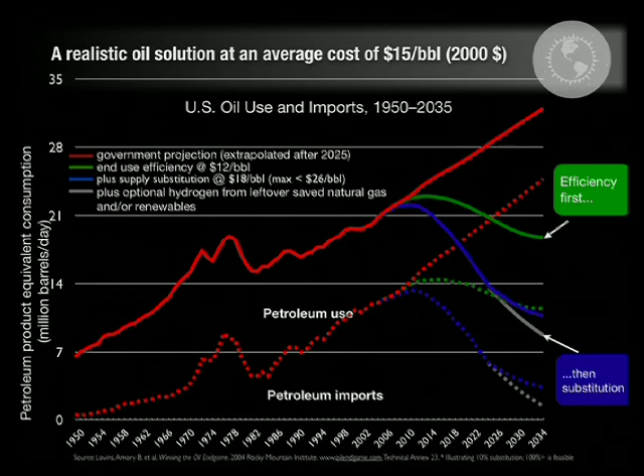And then we would substitute saved natural gas and advanced biofuels for the other half at an average cost of $18 a barrel. The average cost was thus only $15 a barrel, five-fold cheaper than buying oil today, assuming that all of the hidden or external costs of buying and burning the oil are worth zero, a conservatively low estimate.

Our costliest barrel of savings or substitutions would be $26 oil, and the business case is so compelling, therefore, that implementation would need no new federal taxes, subsidies, mandates, or laws.

Now, 70% of U.S. oil is used in vehicles, but their efficiency can triple without compromise, but with better safety, by making them very lightweight, more slippery in moving through the air and along the road, and giving them advanced propulsion. This often improves their performance too, for example, with this Opel diesel hybrid concept car, which does 150 miles an hour and 94 miles a gallon, although not at the same instant.

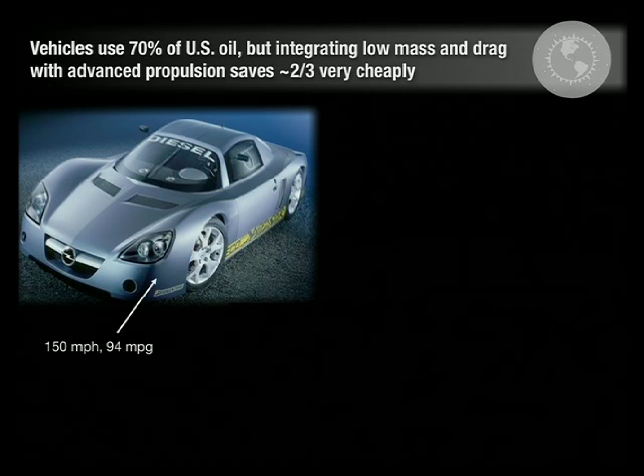Triple efficiency cars can repay any extra cost in about a year, triple efficiency trucks even faster, triple efficiency planes in a few years.

Now, such breakthrough vehicles can serve all purposes and tastes. For example, 10 years ago, my team and 2 European industry partners designed this uncompromised, safe, high-performance, mid-sized suburban assault vehicle. It uses 72% less fuel than its steel equivalent and would sell for $2,500 higher sticker price, a 1-year payback, because it's a hybrid electric, but its 53% lighter weight is free, as I'll explain in a moment.

3 years ago, Toyota showed a carbon fiber concept car with the same interior size as a Prius, but half its fuel use and a third its weight. Its tiny battery bank is recharged by a half-liter engine tucked under the rear seat.

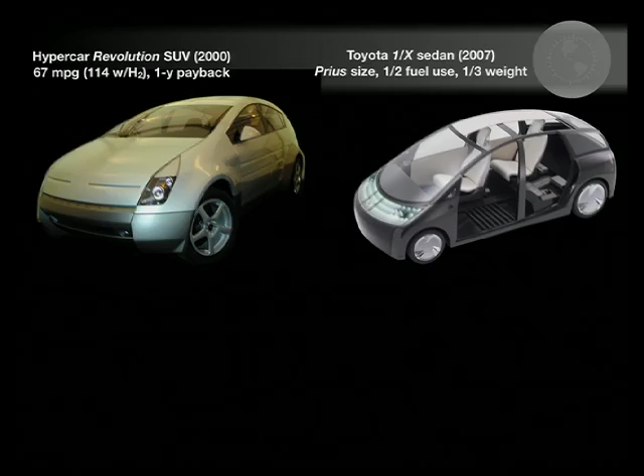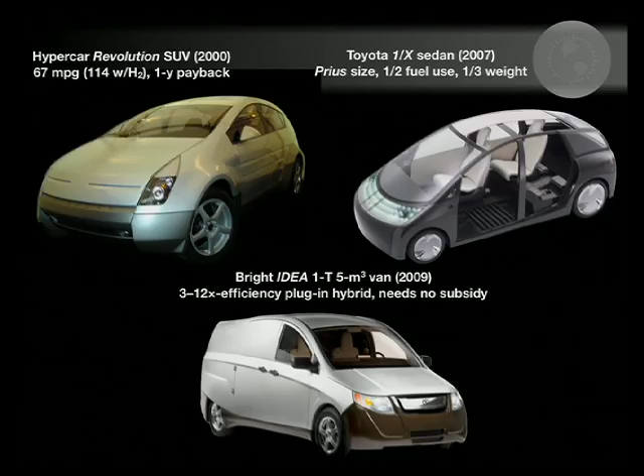And in April '09, RMI's fifth spinoff, which 2 days ago announced a strategic partnership with General Motors, showed this 3 to 12 times more fuel-efficient aluminum van. But unlike other plug-in hybrids, this one needs no subsidy to attract fleet buyers because its lightweight and low drag eliminate most of its costly batteries.

Such platform fitness, taking the obesity out of the car, a ton of it in this case, is the key to electrification, which also creates huge opportunities in the electric sector.

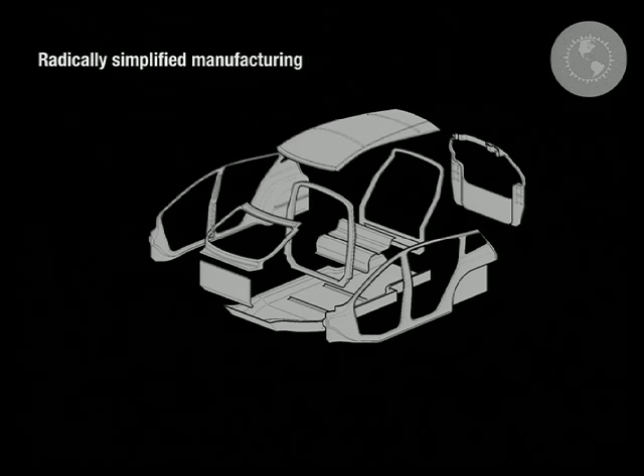Now, ultralighting is the most important automotive game changer for 3 reasons. Only 0.3% of a typical car's fuel energy actually moves the driver. Over two-thirds of the energy needed to move the car is caused by its weight, and every unit of energy you save at the wheels saves 8 units of fuel at the tank.

Huge leverage. But ultralight, ultra-safe cars needn't cost more to build. Here's why. That SUV you saw a minute ago has only 14 parts, each made with one low-pressure die set, saving about 99% of, say, a $500 million tooling cost.

Each part can be lifted with one hand and no hoist. The parts then snap precisely together for bonding without needing the robotic body shop. Laying color in the mold can also eliminate the paint shop. There go the 2 hardest and costliest parts of automaking.

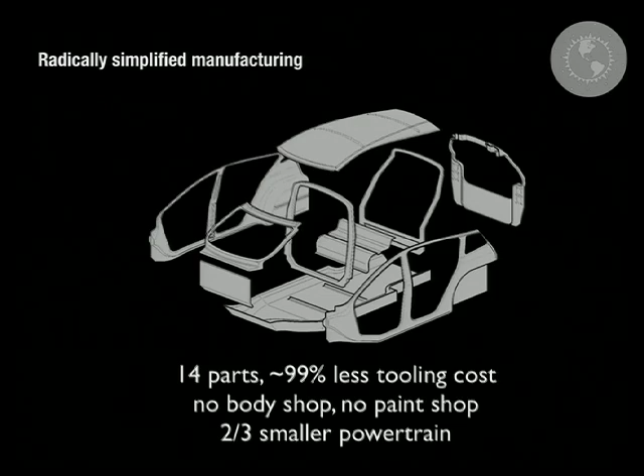And then the propulsion system is also 2/3 smaller, hence lighter and cheaper. All these savings pay for the carbon fiber, making the ultralighting free. New manufacturing from RMI's third spinoff, or its Japanese competitors, can make carbon fiber parts like this test piece.

Tougher than titanium, in just 1 minute, scaling to automotive cost and speed with aerospace performance. Also makes a good carbon cap.

I'll pass this around, don't worry about dropping it. It's been whacked with a sledgehammer without even marking it.

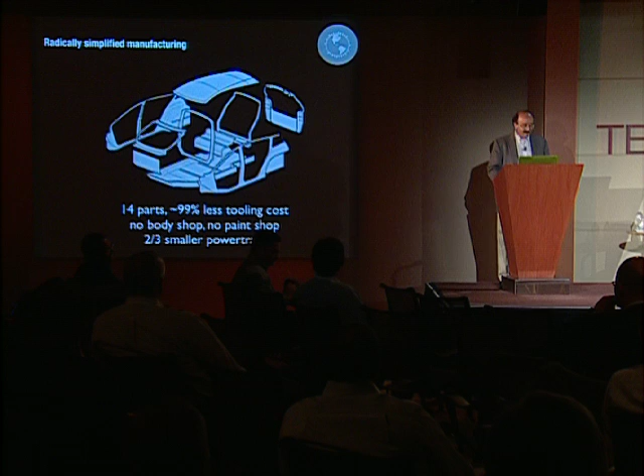Now, if you make all U.S. light vehicles this way, that saves oil equivalent to finding a Saudi Arabia under Detroit, because ultralighting saves half the weight and half the fuel.

The car gets safer because this stuff absorbs 12 times as much crash energy per pound as steel, and the car costs the same to make.

My team accelerates such breakthrough oil savings by institutional acupuncture. That is, we figure out where the business logic is congested, not flowing properly, and stick little needles in it to get it flowing. Our partners range from Ford to Walmart, Boeing to the Pentagon, a bunch more.

Of course, taking the world beyond oil requires 6 sectors to be transformed: cars, trucks, planes, fuels, military, and finance. And I think 3 or 4 of those at least are already around or past the tipping point where it starts getting easier, even though there's still a lot of hard work to do.

For example, Boeing converted its 787 Dreamliner leapfrog efficiency into a breakthrough competitive strategy by rolling out those innovations to every airplane it makes before Airbus could steer itself out of the ditch.

And 6 years ago, we suggested Detroit follow suit. 2 years later, Ford hired the head of Boeing Commercial Airplanes as its own CEO, and now Ford is a sales and innovation winner. Last year, mainstream analysts even began to see peak oil not in supply, but in demand.

April '09, ExxonMobil agreed with many forecasters that U.S. gasoline use had peaked in '07 and will only go down.

Intensifying this shift away from oil is a parallel revolution in how road vehicles are used. If this daily traffic congestion graph were an electricity load shape, we'd apply many new IT-enabled demand response and smart grid techniques to flatten it out.

And not yet doing this for road traffic is wasting trillions of dollars net present value through idle people, idle vehicles, and idle roads.

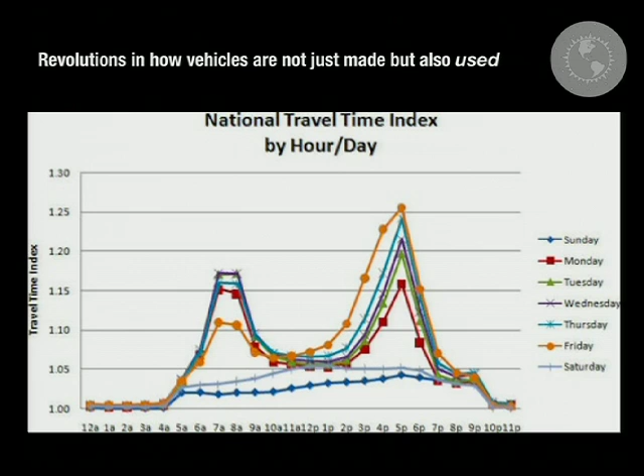But now we can charge variabilized real-time driving costs per mile, not per gallon, make traffic free flowing, use smart IT to enhance transit and empower car and ride sharing, and compete physical mobility against virtual mobility and negatrips created

by smarter land use and real estate models like new urbanist design, so people are already where they want to be and needn't go somewhere else. Those business opportunities are immense.

Even more disruptive will be solutions economy business models like Zipcar that lease a mobility or access service rather than selling cars and gallons. This IT-rich transformation can boost cars' 4% asset utilization by perhaps an order of magnitude.

My second big story is about saving electricity and then making it differently. These twin revolutions promise more numerous, diverse, and profound disruptions in electricity than in any other sector, a future most utilities are ill-equipped to foresee and forestall.

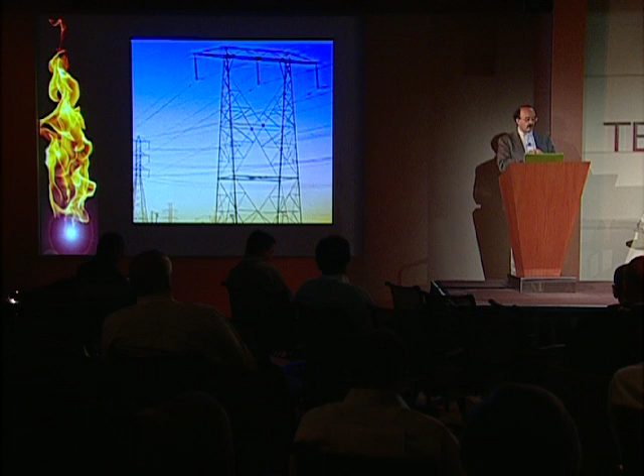21st century technology and speed are colliding with 20th and 19th century institutions and culture to create an inflection point where huge sums will be made or lost.

About 70% of U.S. electricity is used by buildings, 30% by industry. Roughly 3/4 of our electricity is wasted, according to my team's 1,000 technology efficiency assessment 2 decades ago, and since then, efficiency technologies have improved faster than they've been applied, so the potential savings are now even bigger and cheaper.

But an even more disruptive innovation we've been hatching is integrative design, which turns diminishing returns into expanding returns to investments in energy efficiency. That is, integrative design can make very large energy savings cost less than small or no savings. For example, here's our house in Old Snowmass near Aspen, Colorado.

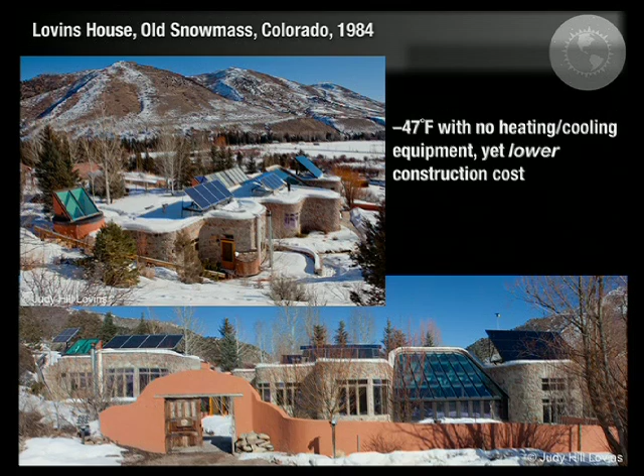Judy and I live there at 7,100 feet elevation, where temperatures have dropped as low as minus 47 F. Continuous midwinter cloud can last 39 days, and frost can occur any day of the year. But this house is fossil fuel free, a net energy exporter, and 99% passive solar heated with no conventional heating or cooling equipment, making it $1,100 cheaper to build.

Inside is this emerging tropical jungle, now ripening our 35th banana crop. In 1984, this house was saving about 99% of its space and water heating energy and 90% of its electricity with a 10-month payback. Today's technologies, which we've just retrofitted, are even better.

And the key is integrative design that gives multiple benefits from single expenditures. For example, the white arch you can see in the upper left has 12 functions, but only one cost. Hardly any component has fewer than 3 functions.

Yet the house needn't look like this to work like this, and its design approach works in any climate, including eliminating air conditioning up to at least 115 Fahrenheit with lower construction costs and better comfort. The same approach works for big buildings, old and new.

A retrofit now underway is expected to save 38% of the Empire State Building's energy. Remanufacturing its 6,500 windows on site into super windows that are almost perfect in letting in light without heat, plus better lights and office equipment, cuts the peak cooling load by 1/3.

And then instead of replacing and expanding the old chillers, we can renovate and reduce them, saving $17-odd million at capital cost that helps pay for the other improvements and cuts the payback to 3 years.

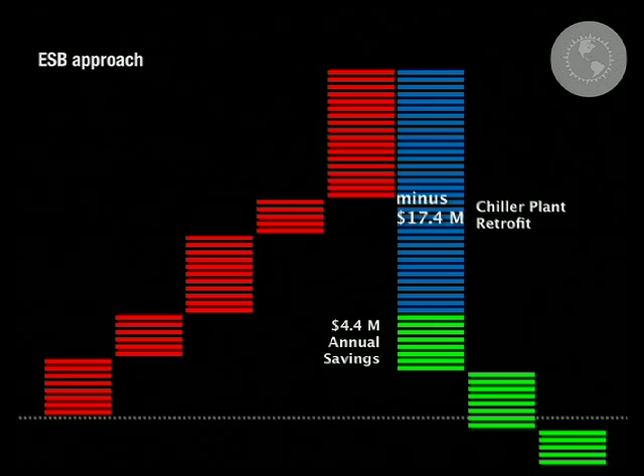Similarly, retrofitting a 20-year-old curtain wall office tower near, say, Chicago could save 3/4 of its energy with a minus 5-month payback that is slightly cheaper than the routine 20-year renovation you have to do anyway that saves nothing. The same approach works great in industry too.

For example, 3/5 of the world's electricity runs motors, half of that runs pumps and fans, and we can save about half of all the motor energy with a 1-year payback by retrofitting 35 integrated improvements. But first, we ought to stop wasting most of the energy used by the pumps, fans, and other motor-driven devices.

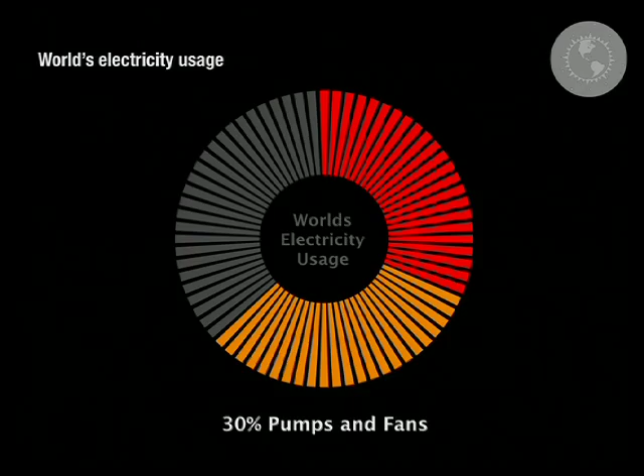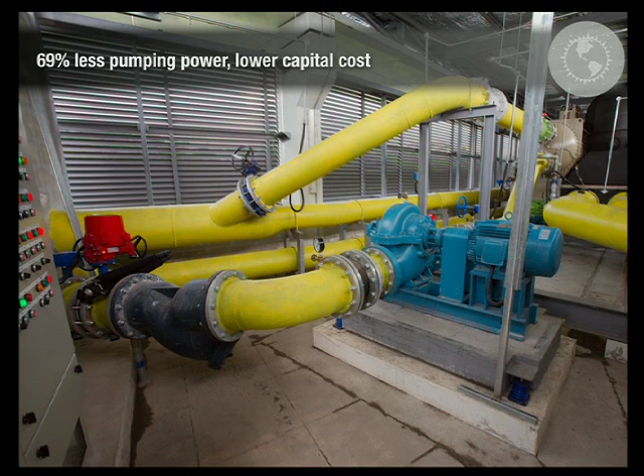For example, pumps, the biggest use of motors, move liquid through pipes. A Dutch colleague redesigned a typical industrial pumping loop to use at least 86% less pumping energy and cost less to build just by using fat, short, straight pipes instead of skinny, long, crooked pipes. This recent design on those lines in Singapore saved 69% of normal pumping energy at lower construction cost.

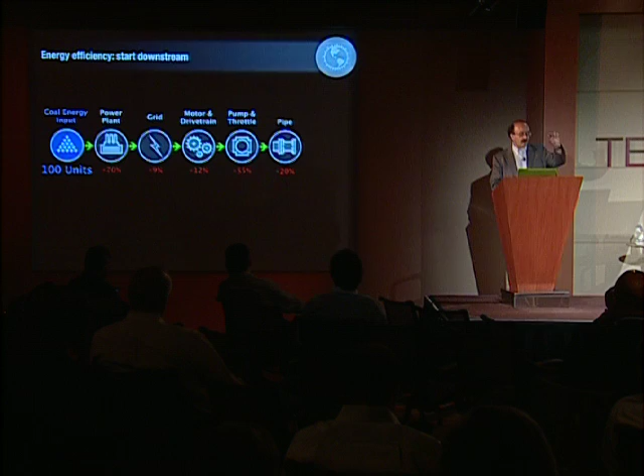So what does this mean for the electricity that's 60% used in motors? Well, from the coal burned at the power plant to the end use, many successive losses compound, so only 1/10 of the energy in the coal comes out the pipe as flow.

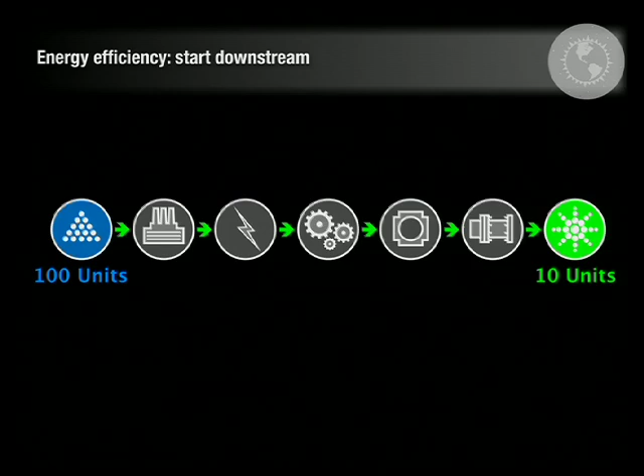But now turn that around backwards, so those compounding losses turn into compounding savings, and every unit of flow or friction you save in the pipes saves 10 units of coal cost pollution and global weirding back at the power plant. Also, as you go back upstream, each component gets progressively smaller and cheaper, so you save the most capital cost too. My team has lately found such snowballing energy and capital savings in more than $30 billion worth of

industrial redesigns in 29 diverse sectors, from data centers and chip fabs to mines and refineries. Typically, our retrofit designs save about 30 to 60% of the energy with 2 or 3 year paybacks, while our new facility designs save 40 to 90% with lower capex.

Meanwhile, that's all on the demand side. How the world produces electricity is shifting faster than most experts realize. Wind and solar power are growing explosively, while central station orders wither because they cost too much and they have too much financial risk to attract investors.

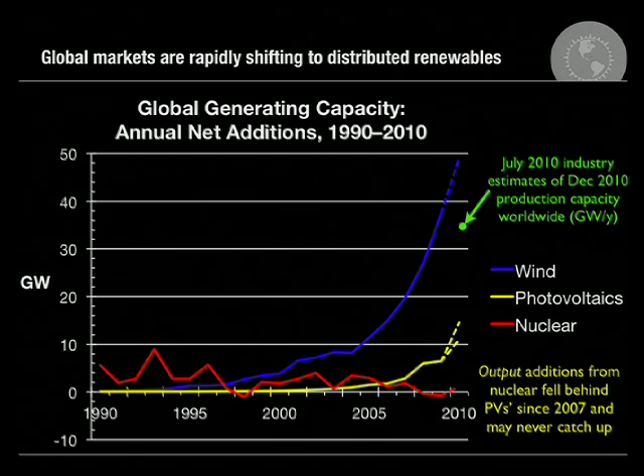By the end of this year, the industry is betting that the world will probably be able to produce 35 billion watts of photovoltaics every year. Grid-connected solar power has sustained 60% average annual growth for a decade and is entering takeoff now into low price and high volume. This renewable power revolution, the biggest infrastructure shift in history, is increasingly led by China, which is now #1 in 5 renewable technologies and just blew past its 2020 wind target.

Power sources that get their economies from mass production, not from giant units, have swapped their share of global electricity production with nuclear power's share. What The Economist magazine calls micropower, that is cogeneration plus renewables minus big hydro dams, made 91% of the world's new electricity year before last.

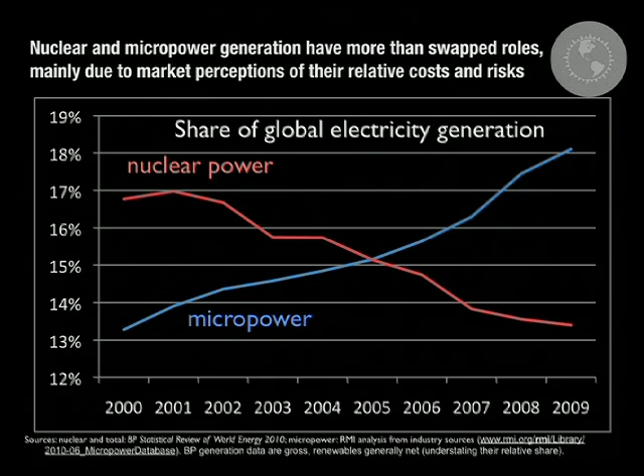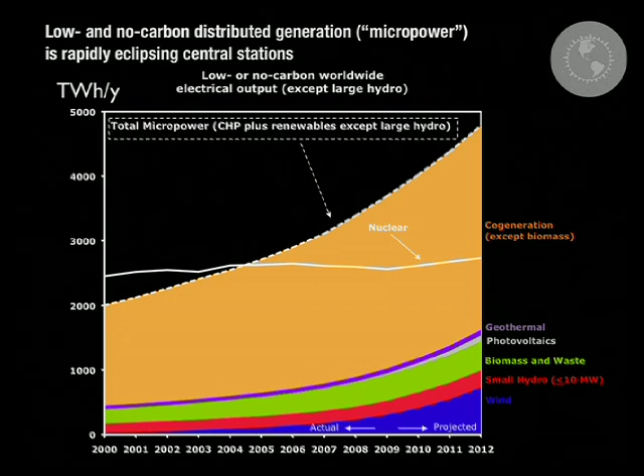Micropower and efficiency are walloping all the central power plants in the world market, mainly due to their lower cost and lower financial risk. So micropower's output, as summarized here, is booming, while nuclear output just fell for the 3rd year. Micropower will surpass nuclear power in global capacity this year and in output in about 4 more years.

Last year, all renewables made up 1/4 of global power capacity, half of the new capacity, over half of the power plant investment, and they generated 18% of global electricity. Renewables, except big hydro last year, got $131 billion of private capital and added 52 billion watts, while new nuclear plants got no private capital and lost capacity.

In the US, they're over 100% subsidized, but they still can't raise any private capital because they have no business case. So here's the number of reactors in blue and their capacity in red that the International Atomic Energy Agency lists as under construction in each year since 1950. The nuclear renaissance is this little uptick recently to 24% of the 1979 construction peak.

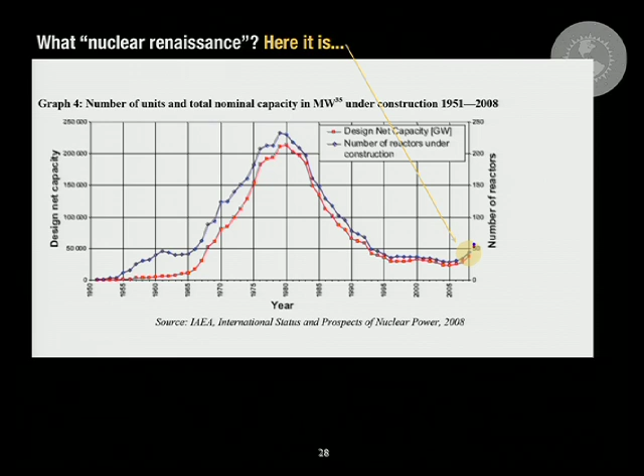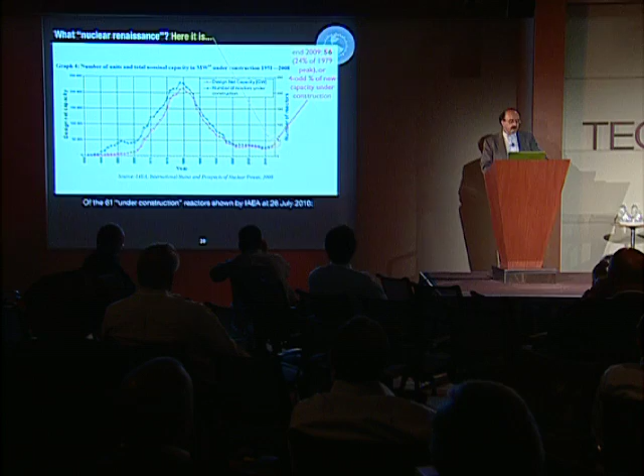There are now 61 nuclear plants officially under construction. However, of those 61 units, 12 have been listed under construction for over 20 years. 39 have no official startup date, half are late, 72% are in 4 untransparent power systems. All 61 were bought by central planners, and none were free market transactions.

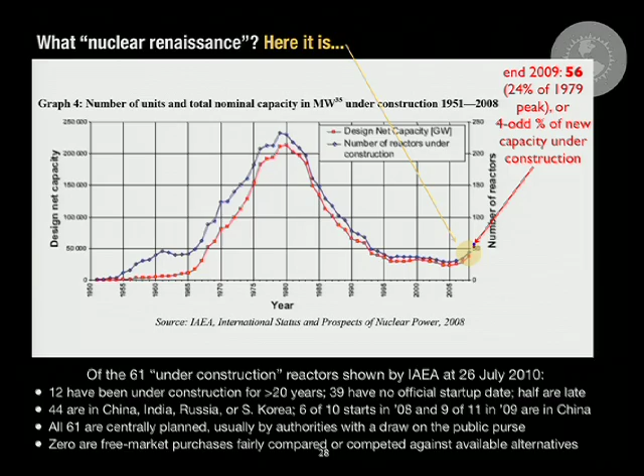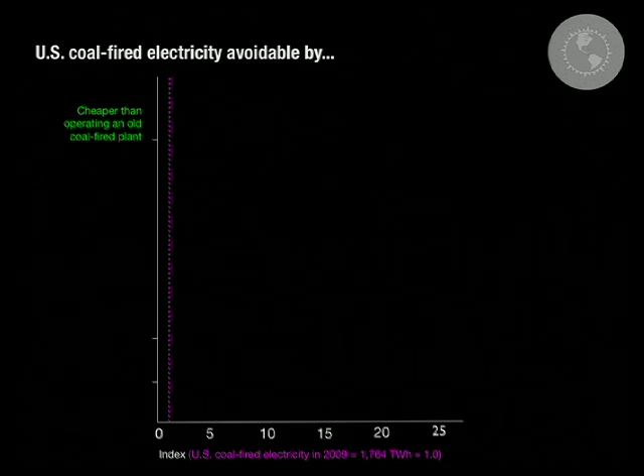So, with nuclear power so uncompetitive in any market system, how else can we displace the coal-fired half of our electricity, which I'll show as a magenta line? Well, first come options that are cheaper than running an old coal plant. Using electricity nationwide as productively as the top 10 states actually did on average use it 5 years ago, correcting for each state's economic mix and climate, would save about 65% of our coal-fired electricity.

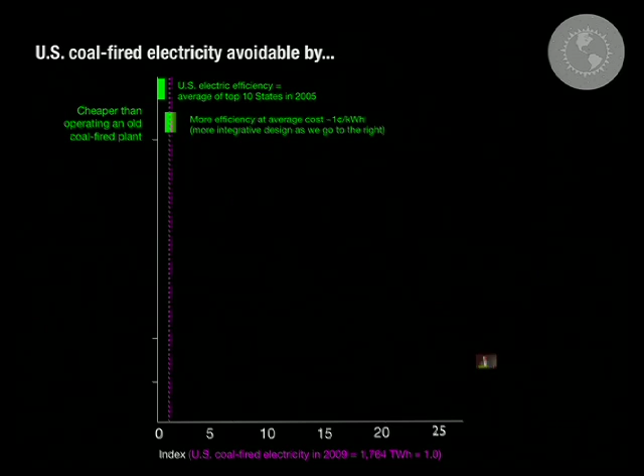Of course, even more could be profitably saved. Last year, shifting fuel prices made it cheaper to run coal plants less and existing very efficient gas plants more, and that cost gap will widen. This will save 35% of coal-fired electricity at a profit, and 35 plus 65 is 100, so we already have the options needed to eliminate those coal-fired power plants cheaper than just running them.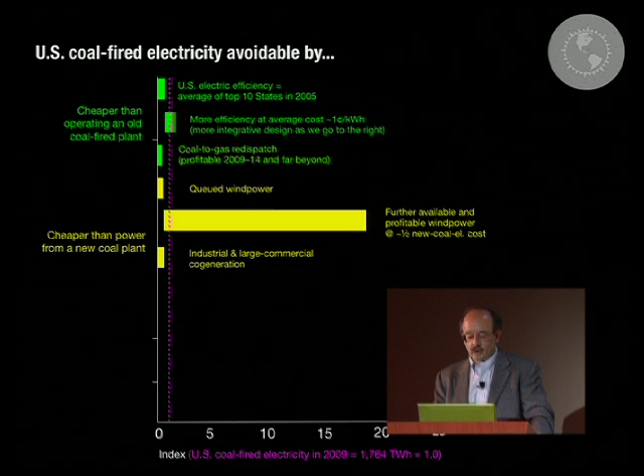Next would come options cheaper than new coal power. Wind power, now awaiting interconnection, could replace about 2/5 of coal power. All the profitable wind power on available land could displace the coal power 19 times over. Cogeneration in industry and big buildings could displace about 65% of the coal power, plus more in small commercial buildings and houses, plus other renewables not yet counted.

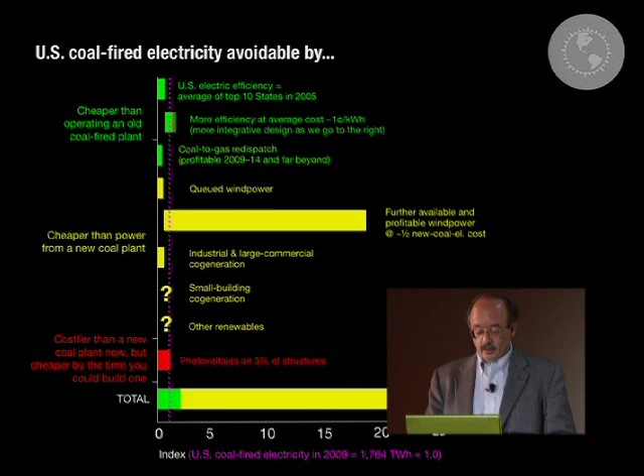And then finally, there are some options that cost more today than a new coal plant, but won't by the time you could build one. Photovoltaics, for example, are in that category, and if you put them on 3% of US structures, that would displace all our annual coal-fired electricity using no land. So add all this up, and we have profitable non-nuclear ways to displace all the coal power in the US more than 23 times, but we only need to do it once.

Now, together, these transformations in efficient use and diverse dispersed renewable supply are starting to flip the whole electricity sector on its head, because traditionally, utilities relied mainly on those giant coal and nuclear plants, augmented them with big gas plants, and bought a little efficiency and renewables. Those utilities were rewarded, as most still are, for selling you more electricity.

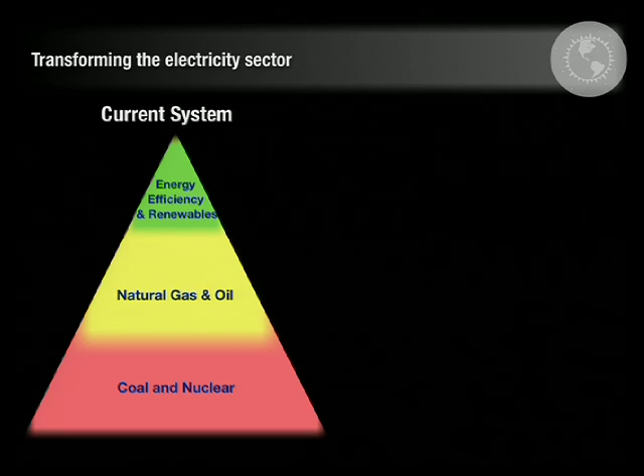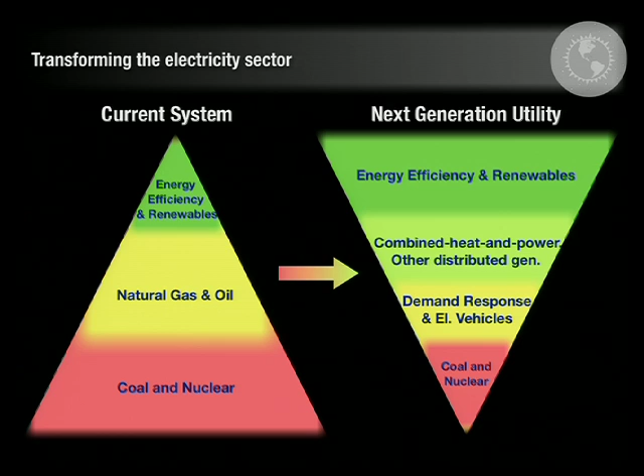But now, especially where regulators are starting to reward cutting customers' bills, the market is shifting massively toward efficiency, renewables, cogeneration, and ways to blend them all together reliably with little or no need for bulk electricity storage. These best buys save about 2 to 20 times more carbon per dollar, 20 to 40 times faster than new nuclear build could. So the market winners are also the most effective climate solutions, and they are the best solutions to nuclear proliferation, energy insecurity, and energy poverty.

Of course, there's still much old thinking. As Oilman Maurice Strong once said, not all the fossils are in the fuel. But as DuPont's former chairman, Edgar Woolard, said in another context, firms hampered by old thinking won't be a problem because they simply won't be around long term. And if you think anything I've said sounds too good to be true, just remember Marshall McLuhan's remark, only puny secrets need protection. Big discoveries are protected by public incredulity.

Thank you very much.